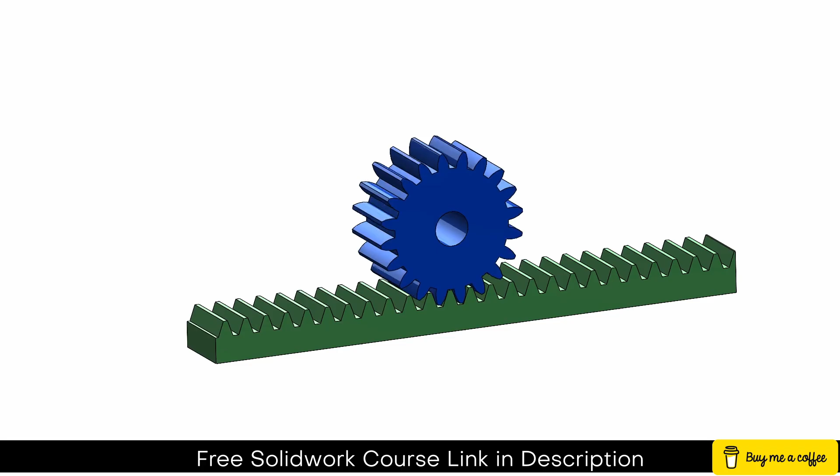As you can see in this case, our rack is fixed but the pinion is rotating as well as moving forward. Let's see how to do it.

Click on toolbox, add-in now, ANSI Metric, power transmission, gears, and let's bring our rack and pinion. Module is 1, pressure angle is 20. Let's decrease the length to 80. Face width is 10. Click OK and close this.

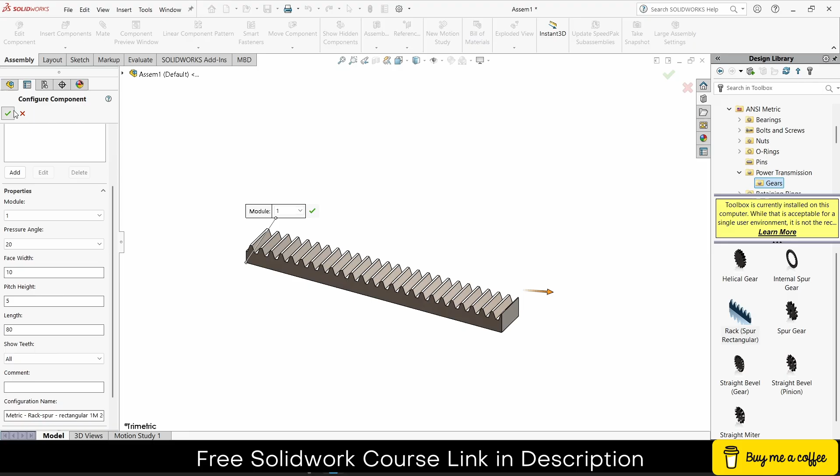Now bring our spur gear. Make sure that they both have the same module, else you will face issues. Number of teeth you can increase or decrease as per your requirement; in my case 20 is fine. Face width is 10. Click OK and close this.

So the first task for me is aligning. Align them correctly. As you can see, I can't move it, the selected component is fixed. Right click, float. Okay, one task is done.

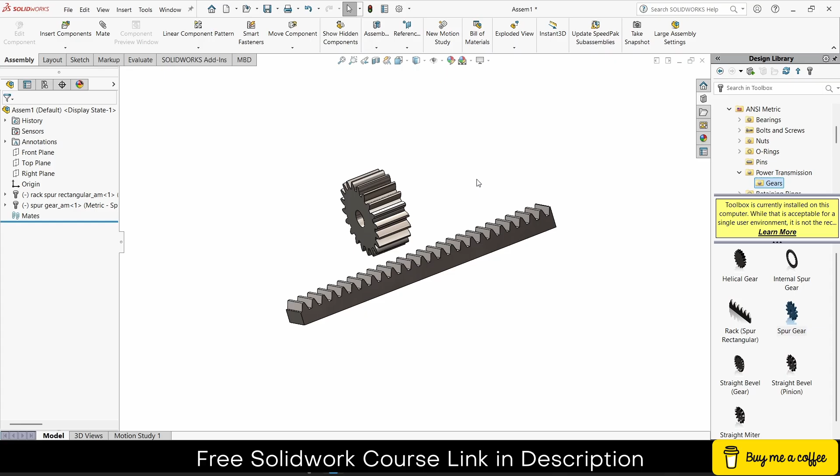Now click here, rotate this. Click on view temporary axis, and I will select this line and this one. Click OK.

Select this face, select the front plane. Click OK. Select this face and this face. Click OK and select this face.

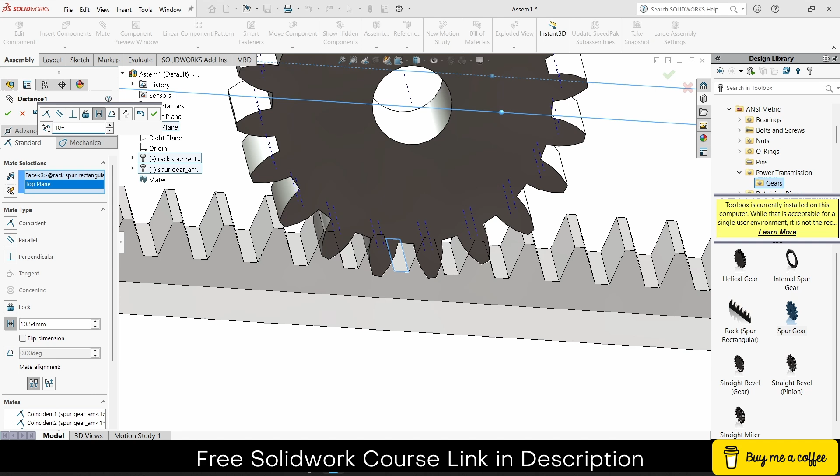Select the top plane. Click on distance, and the distance will be 10 plus 10 plus 0.54 into 2.

Yeah, this is the correct distance. Click OK. So if I'm able to rotate it, yeah, this is the correct distance.

Now basically what I want is for it to rotate as well as move forward. So how can I do that? That's the important thing. First I will right click and make it fixed, because this one is not going to move, but this one is going to go forward and backward.

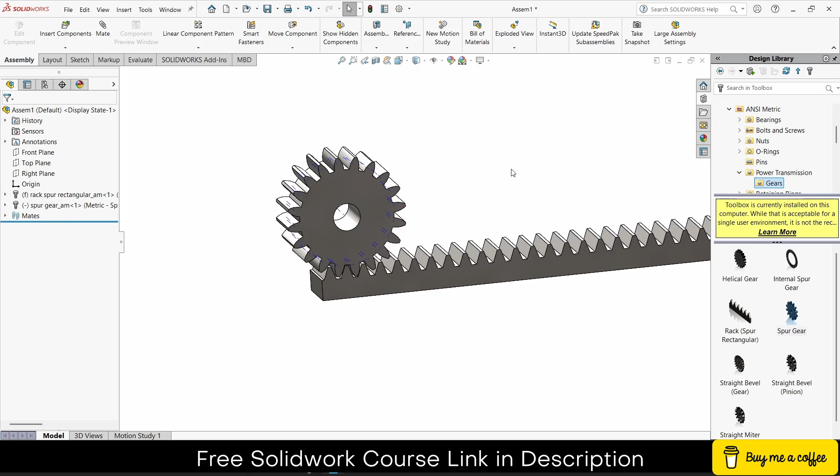So let's move it here first. Now what I will do is try the SolidWorks add-in, SolidWorks Motion. Go to the motion study, click on motion analysis. There might be a chance it will fail the first time. Let's see what I get.

So the first thing I need is contacts, because I'm using physical contacts. Click on contact group, select this one, and for the second one select this one. Click OK. Select this one and let's add distance. How much? Let's say it is 360 degrees, in how many seconds? 5 seconds. Click OK. So basically what this does is make it rotate.

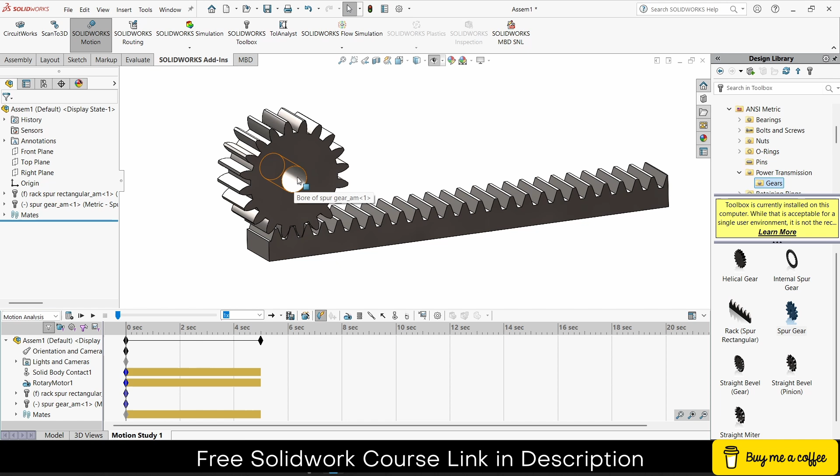Let's see if it is working or not. Click on calculate. Yep, it's working. Now to make it better, slower and smoother, I will increase the duration to 12 seconds.

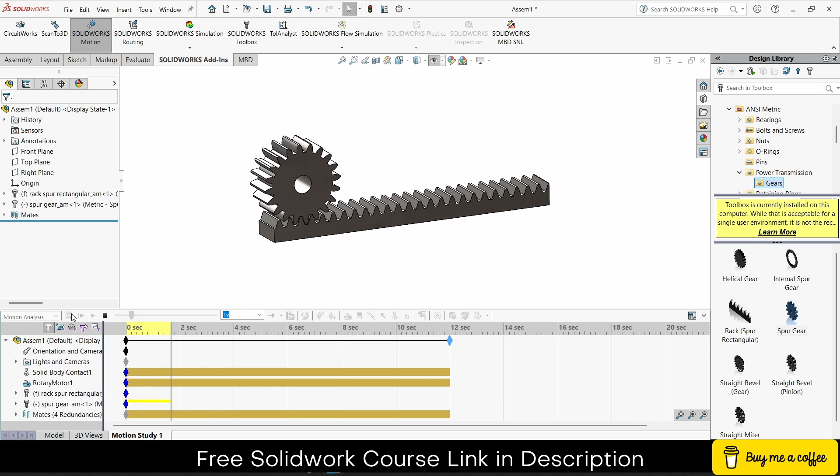I will go to my rotary edit feature. Instead of 5, I will make it 12, and I will also increase the FPS to 50 for better results. Click on calculate. So you can see I'm getting better and smoother simulation results.

So in that way you can create your rack and pinion animation in SolidWorks. I hope you guys learned something from this video.